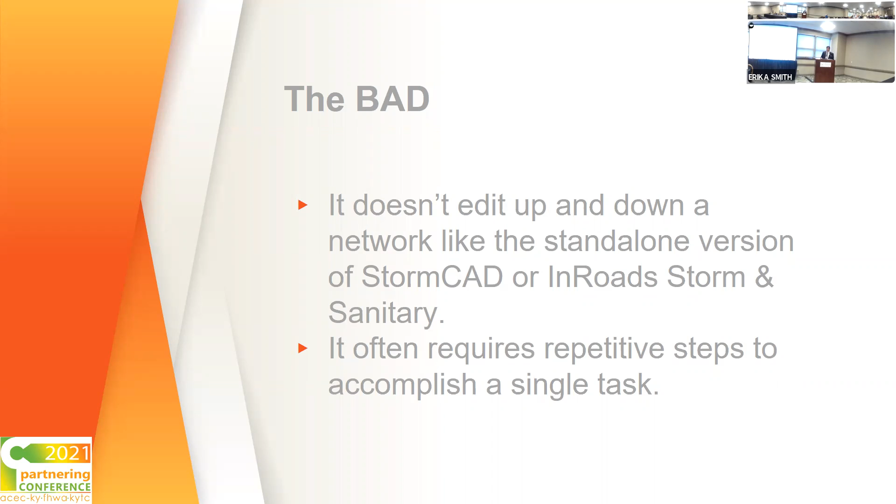We're working on it. We have consultants working with us. They are hoping to have the entire standard drawing library available in our standards by the spring.

I know that was a big thing when Mr. Moses over here released KY with Storm Sanitary - we didn't really have the library for all of our things. It's understandable, it's a massive library, and he did a great job pushing it out. So we're going to try to make this as comprehensive as possible.

Again, spring of 2022. The other thing I mentioned earlier is we're hoping to get trained to a point, several of us in the cabinet, that if you have a structure that's a special structure, we can work with you to develop a cell and put all the information in it so that it's smart and can be included as well.

Now I'll pass this over to Tuco over here, Mr. Jeremy Kubac. He can cover the ugly side.

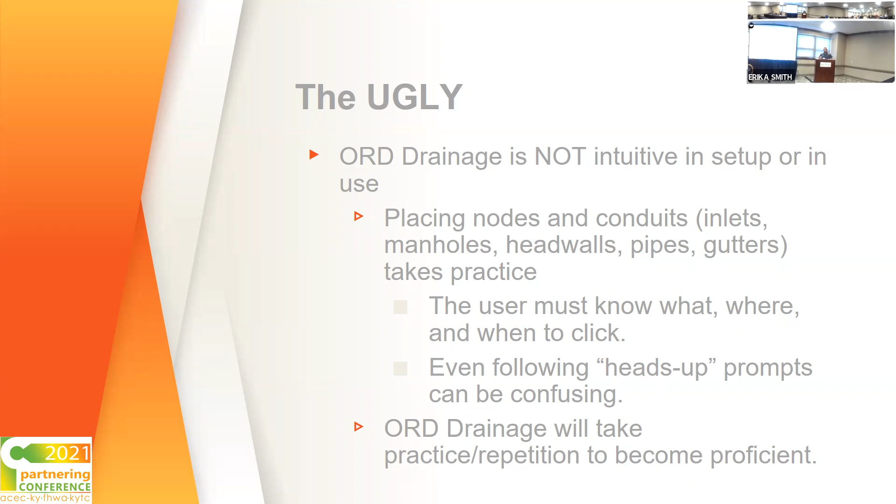I've tried to follow each one by the letter, and I still end up with it upside down or not at the right spot. I'm assuming this is going to get better as we get more familiar with the software and more accustomed to the workflow. I think it's just going to be a matter of picking the right spot and all the right steps perfectly.

And there still seems to be some glitches that need to be worked out. One of the frustrating issues is that the utility information flyout that allows you to modify a lot of the elements you're placing tends to disappear at times.

The only way we found to get it back is to go back up to the utilities view menu on the ribbon. The best workaround we found is to just open it up and keep it docked, and not rely on the flyout. Hopefully that becomes a little more stable at some point.

We've also had menus that get partially cut off, where there are fields you need to select something or an attribute, and you can't see all of it, so you have to go find it in another area. Those are the things that are a little more time consuming that I hope over time get worked out. Potentially it's just a graphics card issue - it might not have anything to do with the software.

Then the flex tables that we previously mentioned. One of the issues is that when you print directly to PDF, some of your fields end up with some kind of coding that's not what's originally on your screen. The workaround we've been using is to take that data, paste it into Excel, and then either print to PDF or continue formatting. With a lot of these issues we're finding, we're trying to internally at Gresham Smith make note of them and pass them on to KYTC.

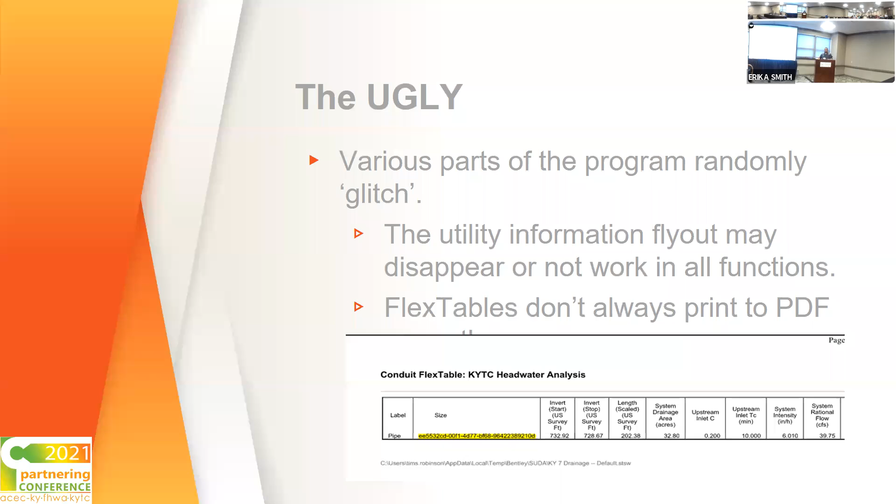Similar to the ORD roadway workflow, the drainage and utilities workflow does have a tendency to crash. The best advice we can give is don't get click happy. Often when you click there's a pause, and it's hard to tell whether something's happening or whether it wasn't a full click. Let it go, give it time to process, because very often these superfluous clicks are what cause you to have to restart the whole thing. So just give it time.

For full disclosure, we're not mentioning these issues to bash the software. We're pretty excited that we have a drainage software fully integrated with our roadway design software. We just want to give an idea of what we've encountered early on. We're trying to implement this as soon as possible, so there's always going to be a learning curve.

Tim's all in for drainage now in his new role, but Andrea and I still do roadway design, so we've got this on both ends with OpenRoads Designer for the roadway workflow and drainage. Everything we've been doing for years has completely changed, so it's kind of like drinking from a fire hose, and I know a lot of people are in the same boat. We know it's going to get better over time—the software is going to get better, and we're going to get better at using it. Really excited about the future on this.

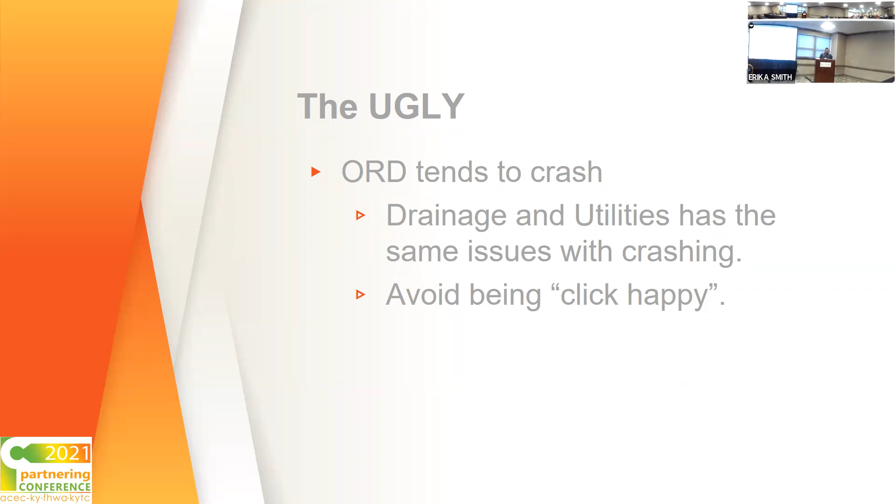And next up, Andrea is going to give a brief demonstration. Speaking of drinking from a fire hose.

So I'm going to give a quick demonstration of how the ORD drainage and utility function is organized and used to complete a drainage design. This is going to be a quick 10-minute overview, so we won't go through everything. I don't expect you to know how to do everything after this, and you shouldn't either, but it should at least give you an idea of the workflow you'll use and what this program looks like.

Before I begin, I'd like to go over some terminology. If you use StormCAD, you'll be used to it, but I used to use Storm and Sanitary, so it's a lot of different wording. For example, in ORD a catchment is the term used for a drainage area. A conduit is used for any element that conveys flow, so not just a utility conduit, but also a ditch or a pipe. And a node is a structure such as an inlet, manhole, ditch beginning, or head wall that is required on either end of a conduit.

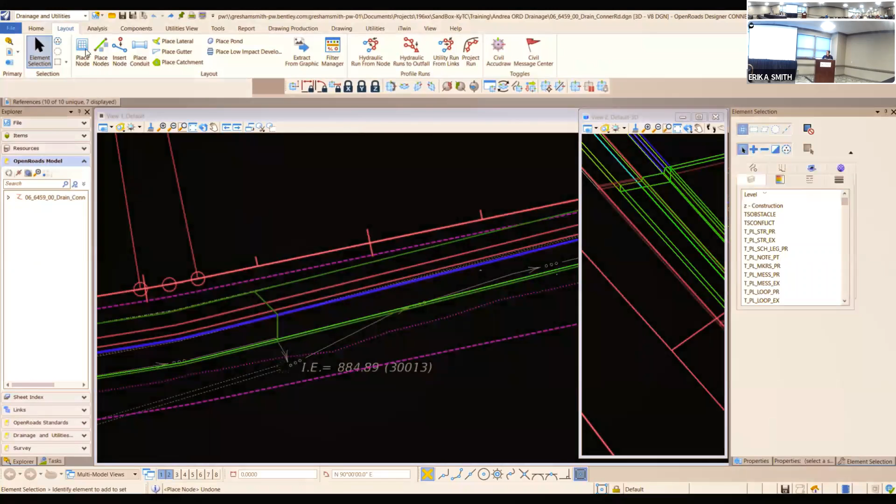So all conduits need to have a node on either end. We will begin by looking at how to lay out a system, starting on the layout tab and clicking place node. In the command window for place node, we can drop down our feature definition to select what type of inlet we want to put in. I selected a type A, and I'm selecting the gutter line here to place it on, so it will change with that as I mentioned earlier. I'm placing that, following the heads-up prompts until I get it placed correctly.

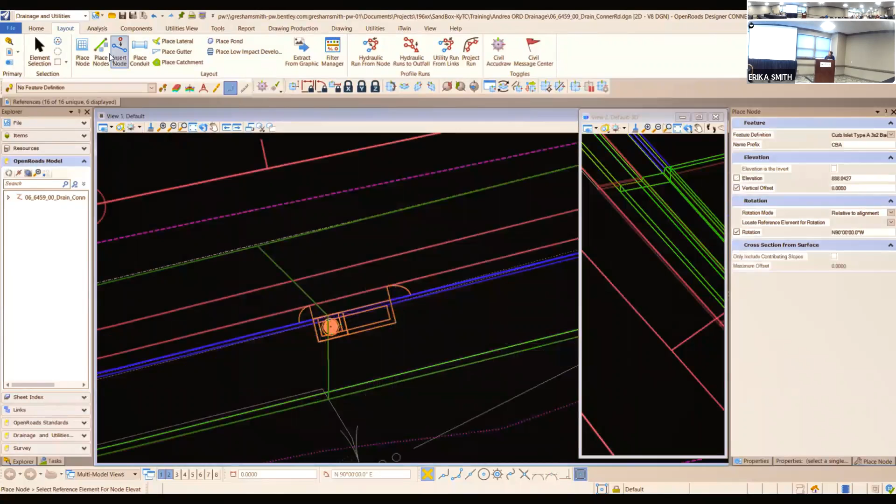Once that's placed, I'm going to add a conduit—my pipe from this structure to the one downstream. I'll do that under layout, place conduits. In this prompt, I'm selecting my conduit type, which is going to be a storm pipe, an RCP, and I will stretch that between my two inlets.

Unlike storm and sanitary, I think we can do it either way, and once it gets flowing, it doesn't have to be upstream to downstream.

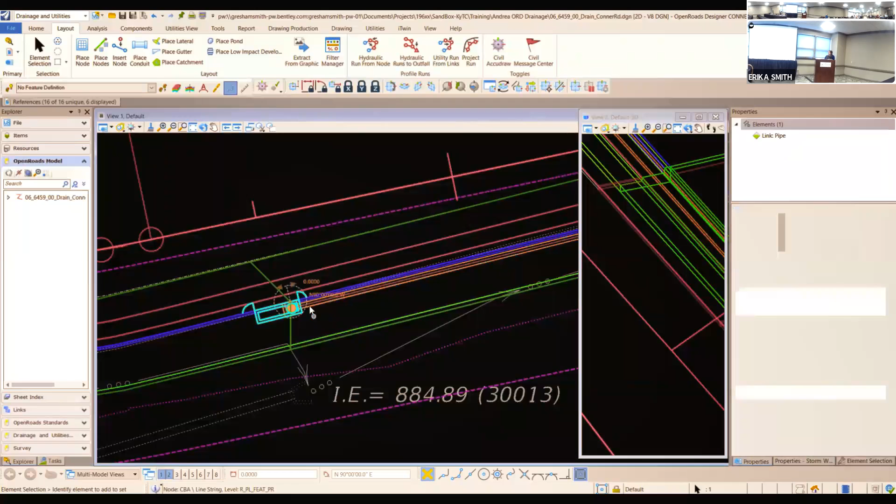We can click on our inlets, go over to properties, and change our feature definition here. So if I entered it as a type A and I want it to be type 13 or something else, I can change that here. I can also select it, and by just selecting it, I can change that rotation angle. So rotating it is relatively easy with just that pop-up.

I can also select it and look at the utility properties, and that has more of the hydraulic properties of the inlet in it. Once you run the system, these fields down here that I'll say NA, they would be populated. So a lot of that is in there.

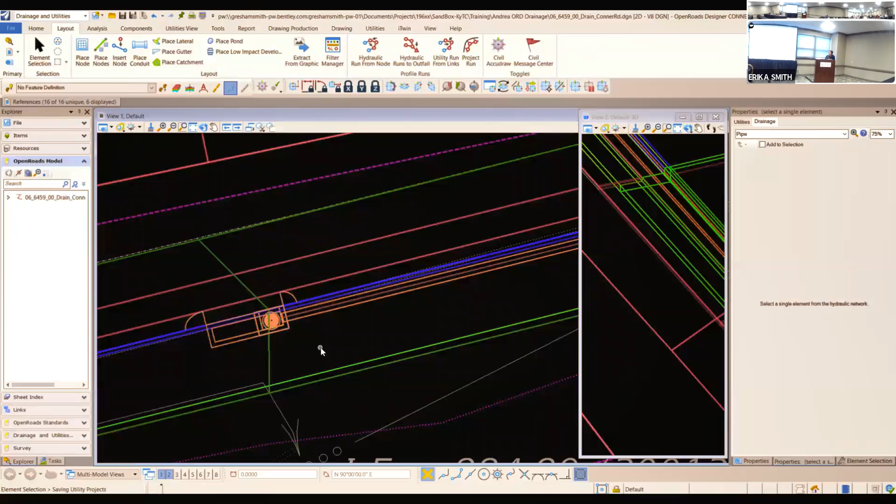And we can do the same with a pipe. So if we were to look at a pipe, we can change its feature definition in the properties tab. But just keep in mind, you have a properties tab and a utility properties tab that kind of contain all that information.

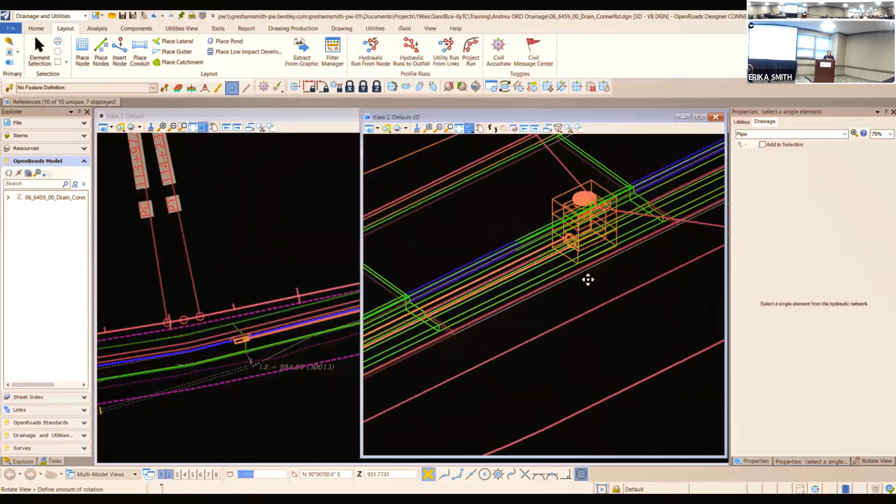As we were creating this 2D model, in the background this 3D model was being created. So you can see the inlet we placed, the pipe we placed, are both in there. And if we had our 3D utility file in here, we would also be able to see how close those are if we have conflicts. So that's kind of nice.

All right, next we are going to add our catchment or drainage area. So I have this bright green area down here I'm going to use. Under layout, we'll use place catchment. I will select my feature definition for that catchment. That feature definition, the main thing it's controlling is the runoff coefficient at this point, which we can change later. So I will follow the prompts to select that area and attach it to this inlet.

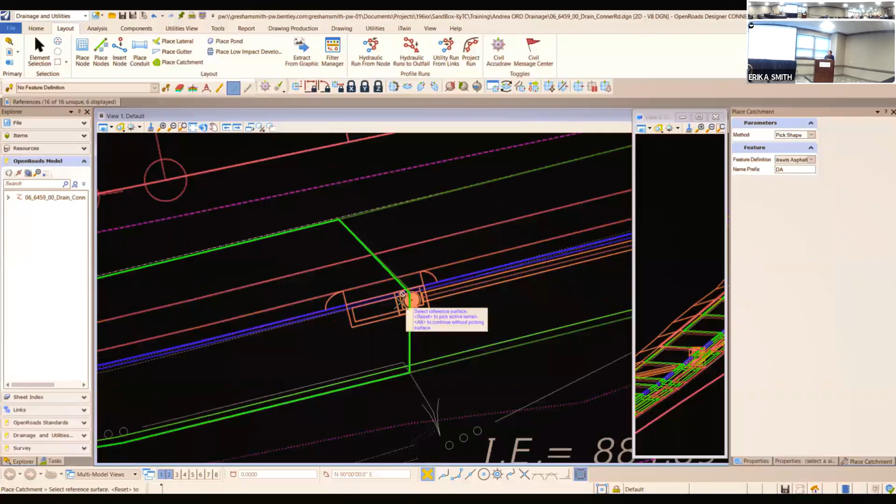Okay, now it's green, the other color green, so it's in there. Unlike storm and sanitary, if I select this feature and I delete it, it will be out of the database. In storm and sanitary, you had to actually delete it from the database. Here you can just delete the feature and it's gone. I can undo and it's back, which is similar to other ORD workflows.

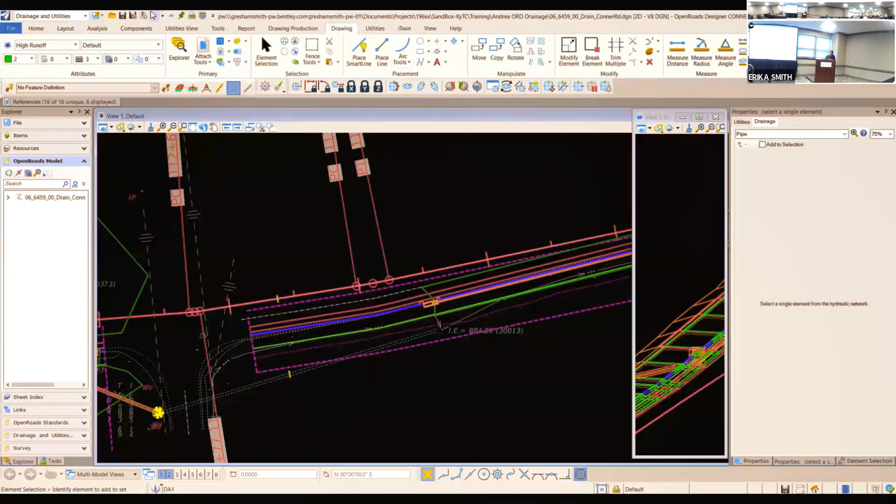Also, I can select it. Over here, I was looking at the properties, and I can change that runoff coefficient manually if I want to, so if it's different from what my feature definition was. There's where I deleted it and brought it back.

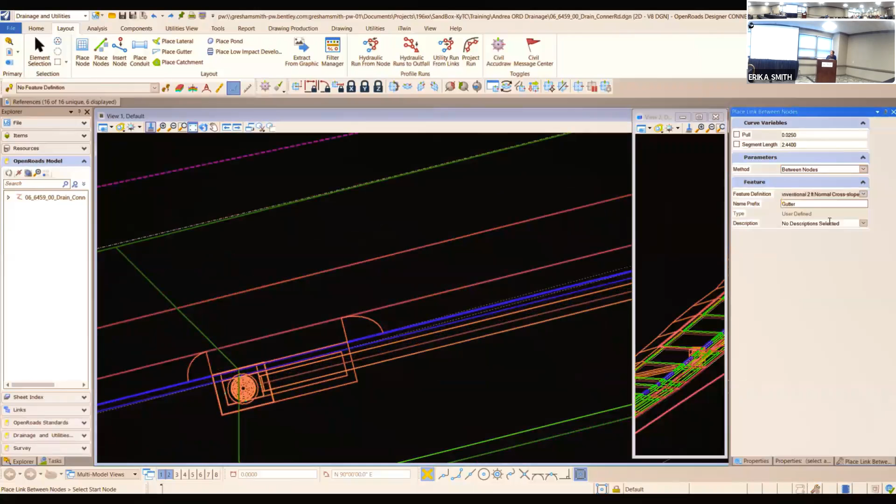All right, now we are going to look at laying out a ditch as part of our system as well. So like I said, any conduit, which would be a ditch, has to have a node on either end. So first I'm going to place an inlet again, following those same steps, I'm going to change my feature definition.

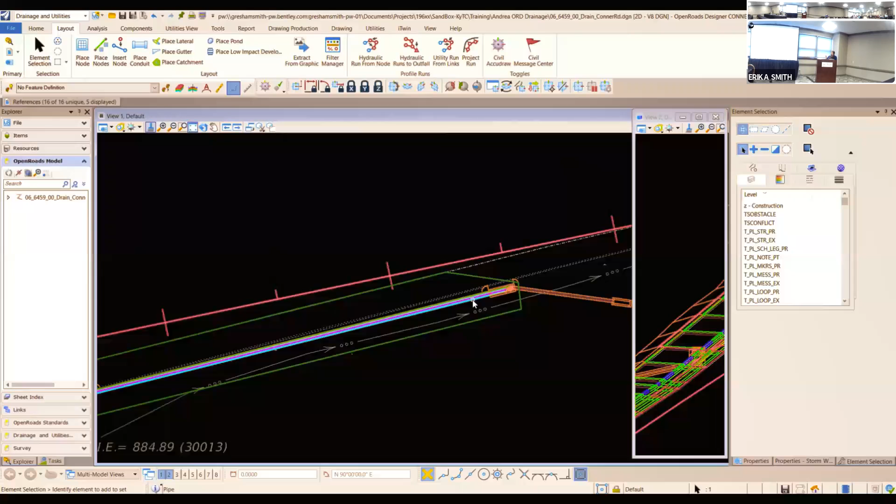Oh sorry, no, I'm not doing that yet. I'm placing a gutter. A gutter is basically defining our bypass flow. So where that would be a feature of one of our structures previously, we actually create a line and it's a feature in our drawing that represents that bypass flow. And so that's where we did layout, place gutter. So yes, that was the other point.

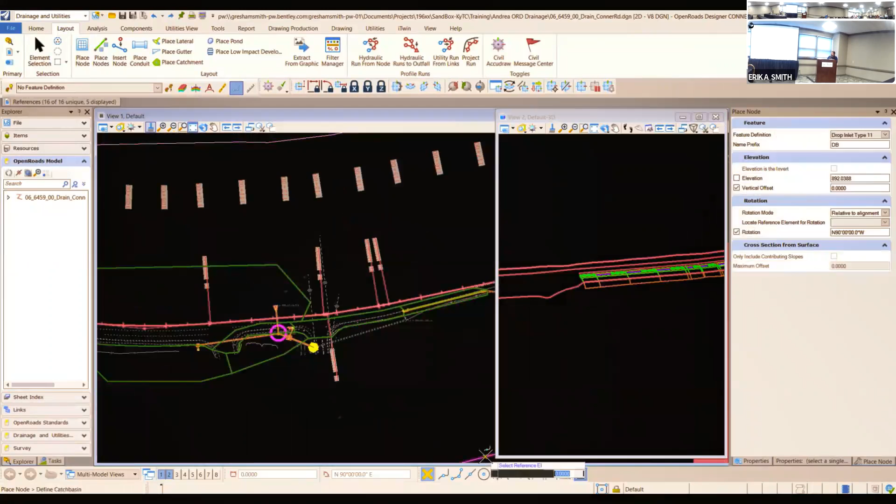Now we will lay out a ditch. And so first we will need to add, I'm adding a type 11. So that was layout, place node, changing my feature definition to a type 11. I will place that on the existing surface or whatever terrain I have referenced in here.

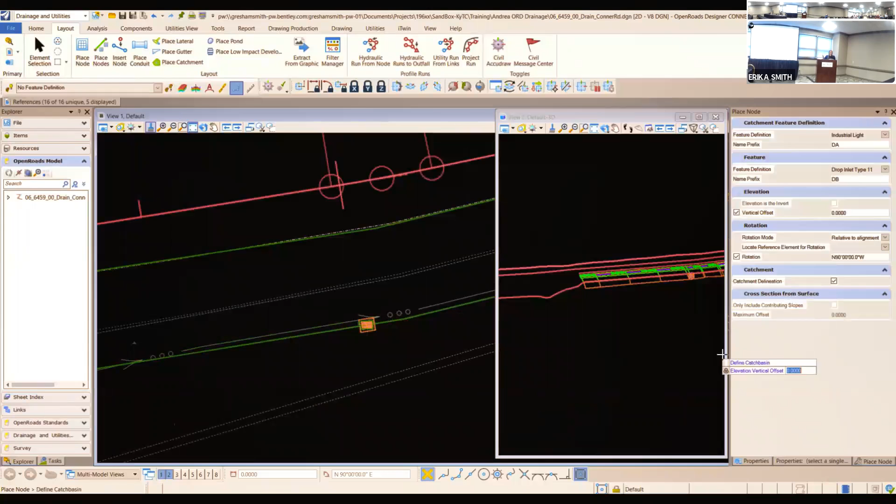You'll notice when I place it, a green area is going to come up over that, because I have catchment definition checked over here on the right. So it's going ahead and defining a catchment based on that area, based on that terrain I had selected. This is obviously trash, it's just the rain falling on top of that inlet. So when I'm placing an inlet in a random place like this, for this demonstration, it's obviously not helpful. I can just delete it and it's gone. But if you're placing it on a terrain and you already have a low point in that, it can help you define those drainage areas or catchments.

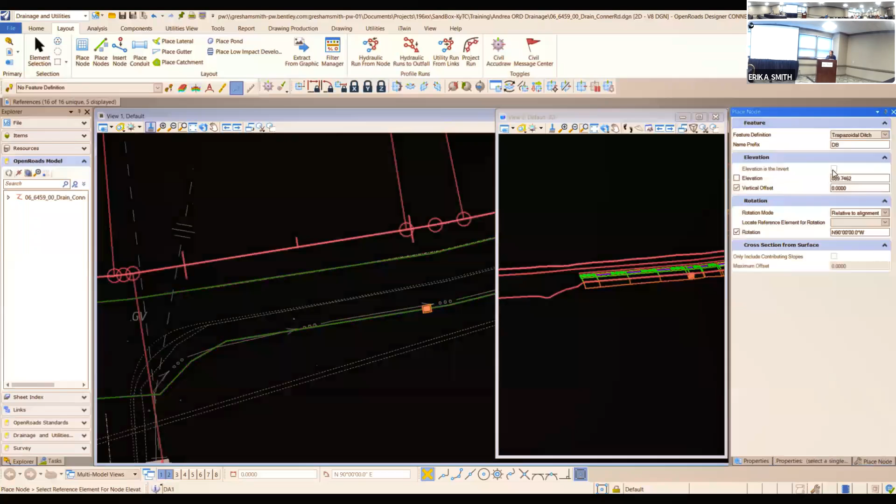So I deleted that out. Now I'm going to place another node for the beginning of the ditch. My feature definition will not be an inlet, I will drop that down and change it to a ditch point. And I'm just going to place it kind of where we'll pick the existing ditch up.

So when I place that, you'll notice in the 3D view over here to the right that a kind of two-dimensional channel piece will pop in. So that's placed.

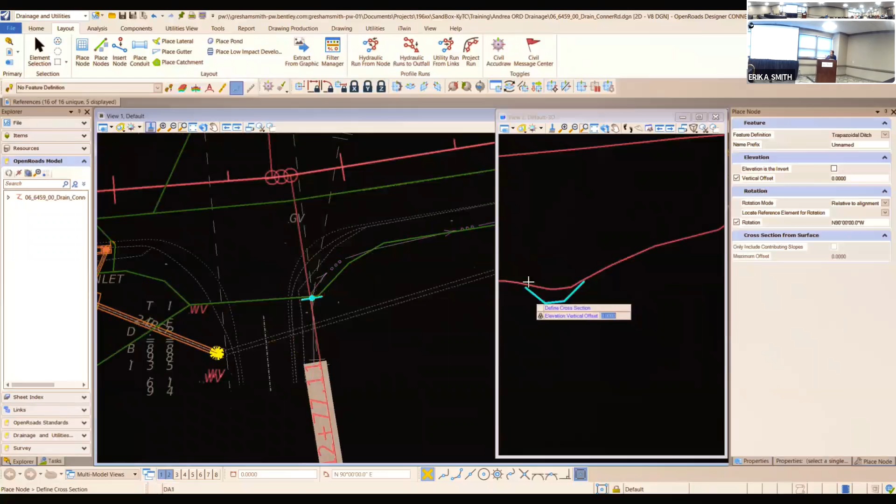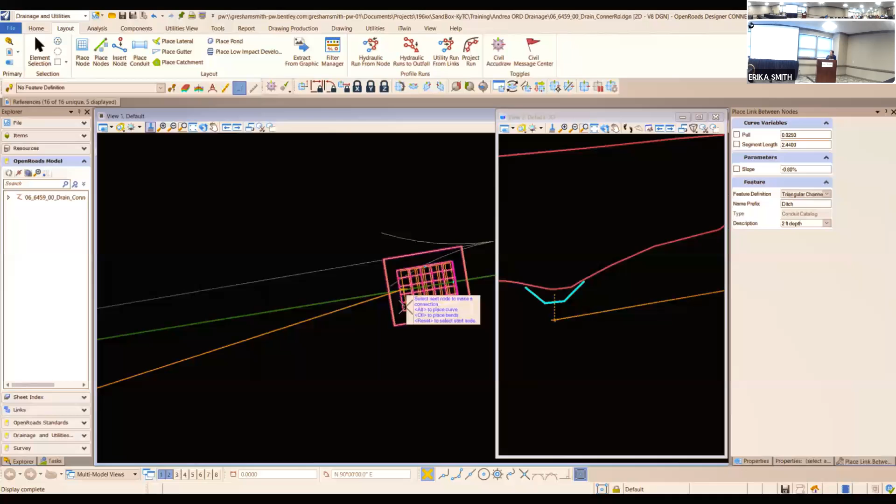Now we can go to our place conduits command again - layout, place conduit. I'm going to change the feature definition to a channel, and stretch that between our ditch beginning and inlets. You'll notice once that ditch comes in, you can see it in the 3D view.

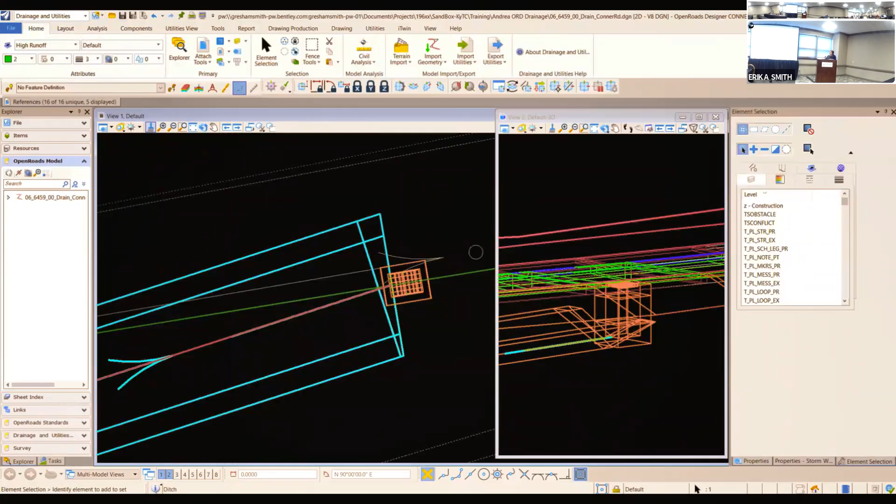It wants to attach to the invert of that pipe, which is not what we want, obviously, with the ditch. This is something that KYTC and those developing these cells are currently fixing, but you need to watch for things like this. So in this instance, until this is fixed, you'll need to go in, select your ditch, and open up these properties over here. You can actually manually change the elevation of any of these. So over here, the features, I'm changing the elevation of that. Once I change it, you see it pop up. So that's another benefit of having that 3D model open at times - as you're designing your 2D model, I wouldn't have seen that, and now I can.

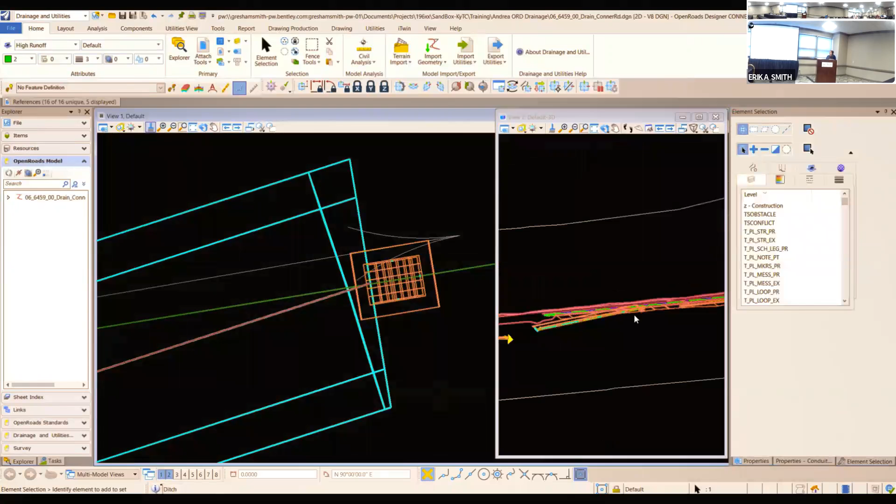I am going to also add a catchment for this ditch right now, just a dummy catchment so that we can put flow in this ditch. So in our analysis, you can see how we can check that we have flow in there. I'll create that area again - layout, place catchment. I can change that feature definition if I want a different runoff coefficient.

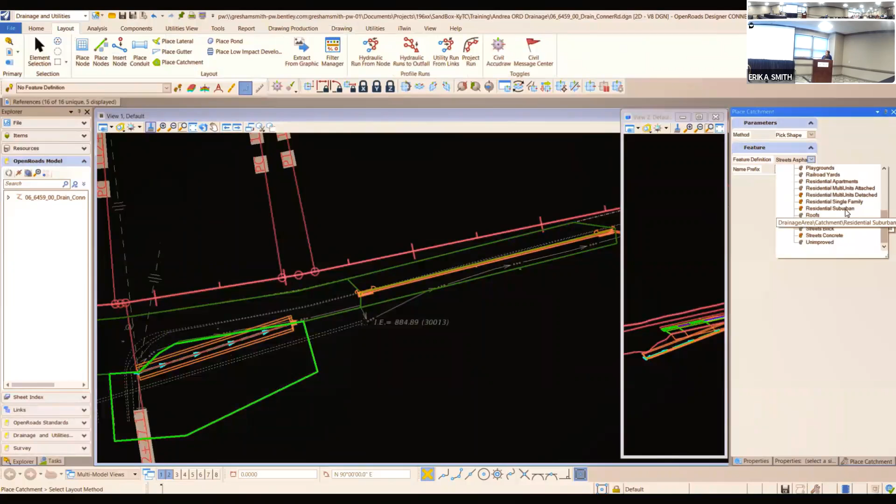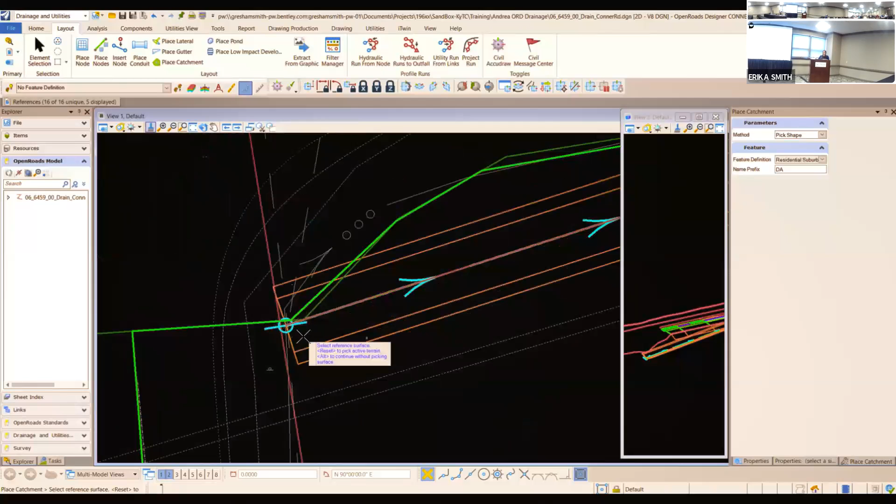I'll select that area. One of the things you will notice is if I go to try to attach this to the ditch, it's going to give me that circle with the X through it. You can't attach catchments to conduits - they have to be attached to a node. Obviously we don't want it attached to our type 11 because then it's not going in our ditch. So we can attach it to that node at the beginning of the ditch.

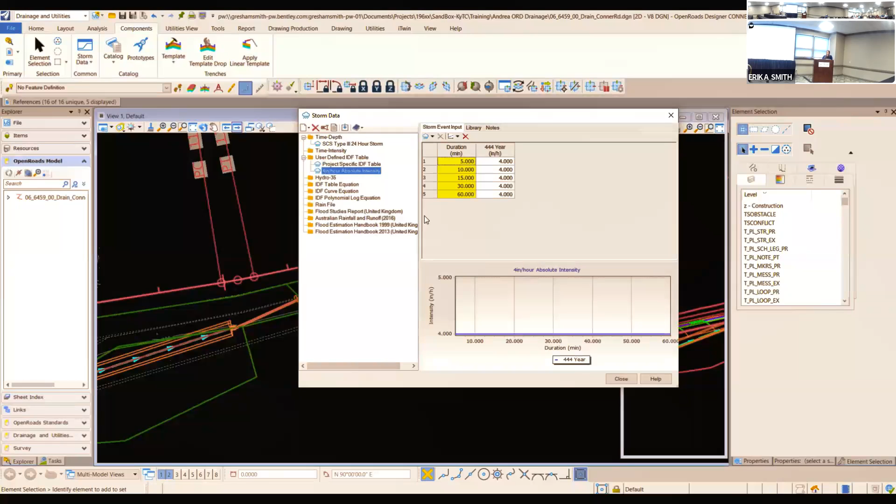Now we're going to look at this components tab, and this is where we're going to enter our storm data. Okay, so once we click on that, we have a few tables in here - you'll probably want to have a few tables. The first one is our IDF curve, so we have all of our important storm events in there. The second one is the 4 inch per hour table, so we can use that for our spread calculations. All of this is contained in one file.

Now we're going to set up our analysis. This is where we will create alternatives - we will create an alternative for each storm that we want to model or run. So under rainfall runoff, I have a few different alternatives. There's a 4 inch per hour one, and it's referencing that 4 inch per hour table that we entered. So this is that part that's been talked about that's a little redundant - you feel like I have to enter my storm and then I have to make an alternative of that storm, and I have to make a scenario of that alternative.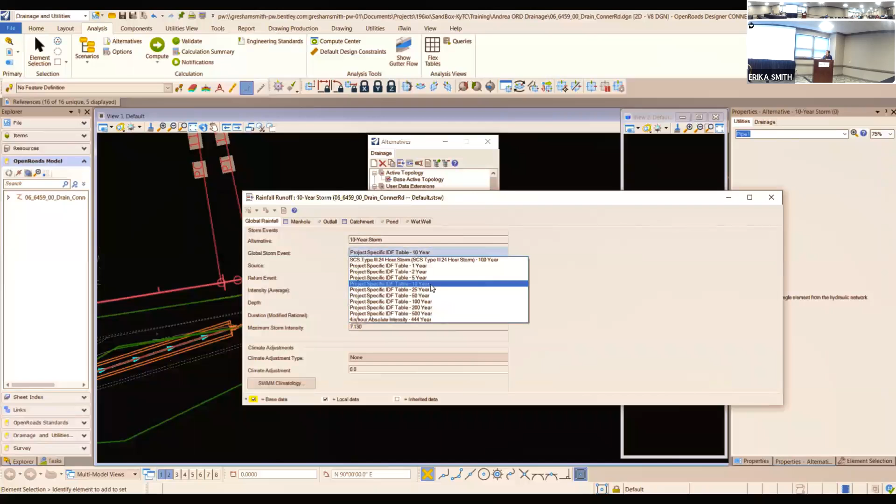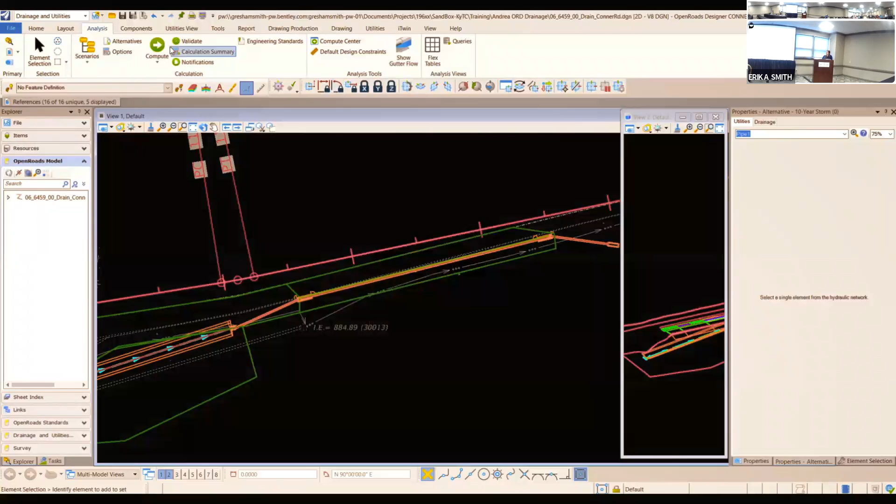But that is how it works. Your scenarios can actually be multiple alternatives, but this is going to be the main alternative that you're changing when creating a scenario. So this is just popping back over to show you that I have that storm data in there - it's able to pull not just a table, but a column, so an actual 10-year storm event, a 100-year storm event. So I set those up in my alternatives, and then I go to my scenarios, and each scenario references that alternative. Over here on the right, you can see all the different scenarios that I can change, but that rainfall runoff is what I'm interested in right now. Most of the rest you'll probably leave alone for this part.

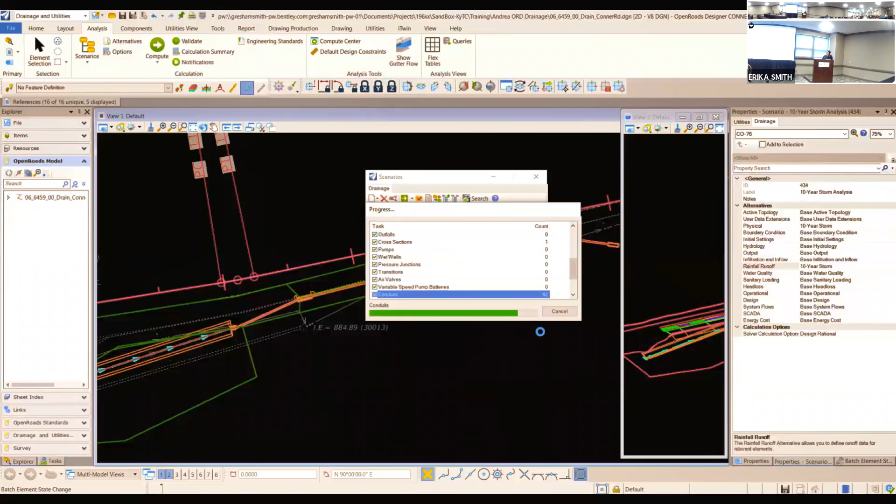Okay, so once we have all that set up, we can select the scenario we want to run, select it, hit that green compute button. And you want to see this green box at the end, this box - that means that it ran.

If you don't get that, you have a big problem. You'll still want to look at the warnings you get and address those, or decide what's not important, depending on which situation you're running. But that means it ran.

Now, to see a little bit of how our water is in our pipes, we can look at a profile. Under Layout, we go to Create Profile Run, and stretch that between our ditch node and our outfall. So now we have this profile run.

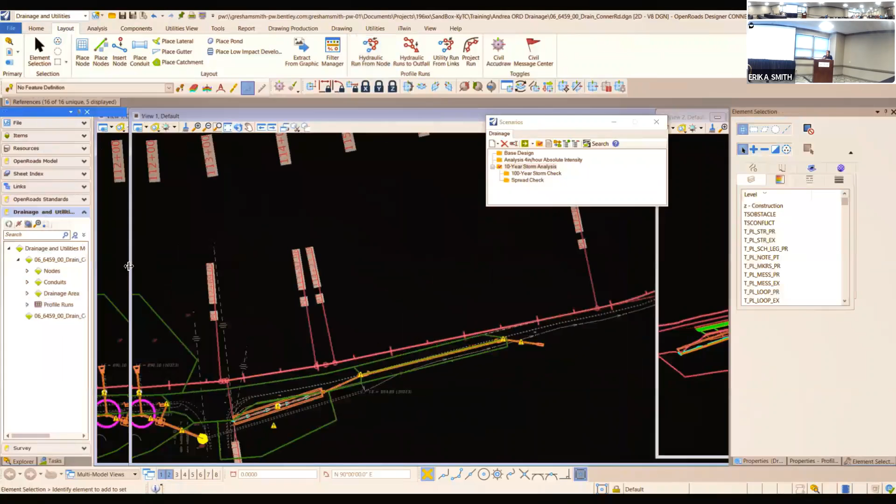We can go over to the Explorer tab, and under Drainage and Utilities, expand out the profile runs. The one I created was just called 'profile run' - I didn't change the name. We can look at that in an analysis profile, or in what you're probably more familiar with, a regular ORD profile. I'll open that up here, and you'll be able to see the water depth within it.

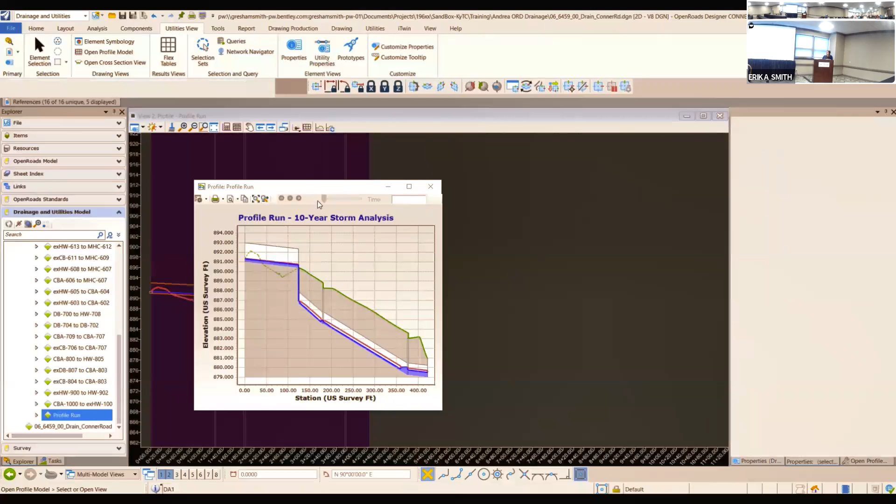So that's a good indication also that it ran. So we've run our analysis, and now we need an output.

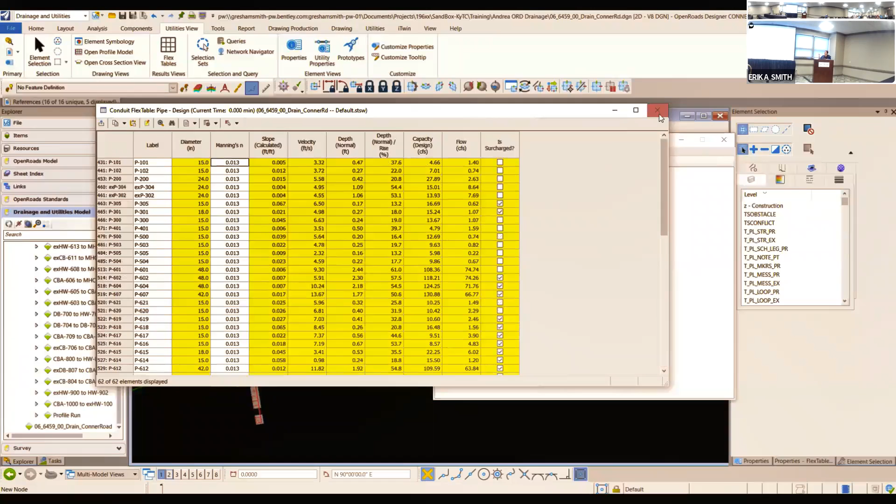You can look at it here, but also if you want to edit it to show whichever feature for a certain pipe or inlet, you can just right click on it. You can make a copy of it and change it, or just change it and enter any of these fields into your table. So you can create a custom table with whatever information you want.

So that was the super quick version of how it works. Hopefully at least you got an idea of the workflow this uses and some of its capabilities. There will be more training - I'll let Tim speak on that.

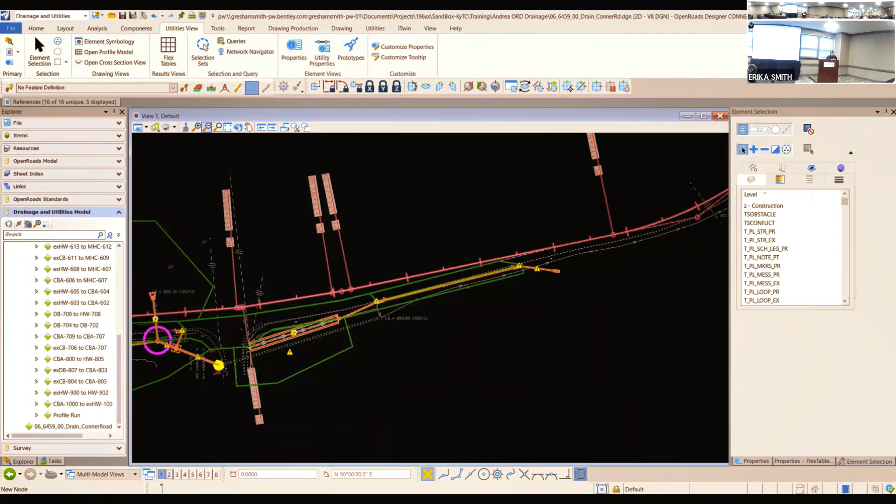First of all, we want to talk about the future, Lord - for those of you who aren't getting the reference, that's Marty McFly in Back to the Future 3. He was Clint Eastwood, so there's the title. If you didn't get that, I can't help you. But you're not a good engineer if you're not nerdy enough to get that. Okay?

Anyway, we do want to look at what everybody wants to know - what's the future, where we're pushing towards. One of the big things with ORD has been plan production.

Anybody who's done the roadway plans knows plan production has been a hassle. With this last release, supposedly Bentley worked on the white space and made plan production a bit easier. We're working with our consultant who's finishing our library - he's also doing the training. He's working on making sure we have KYTC pipe sheets, which are more profiles rather than sections. We're also making sure we're working on annotation for the pipe sheets and plan and profile sheets to go with the drainage.

If you need more nodes than the 100 limit - there might be a few out there, but most should be able to be broken up into multiple DGNs - but if you do need it, there is StormCAD Unlimited. Also, Dave Lamb and I were looking at needing pond routing, so having a pond pack and other functions. Civil Storm is available, but those incur additional costs, and you'll have to talk with Bentley about that. It's based on size and duration of use. With Civil Storm, you get the pond model through PondPack, SWMM analysis, and watershed routing.